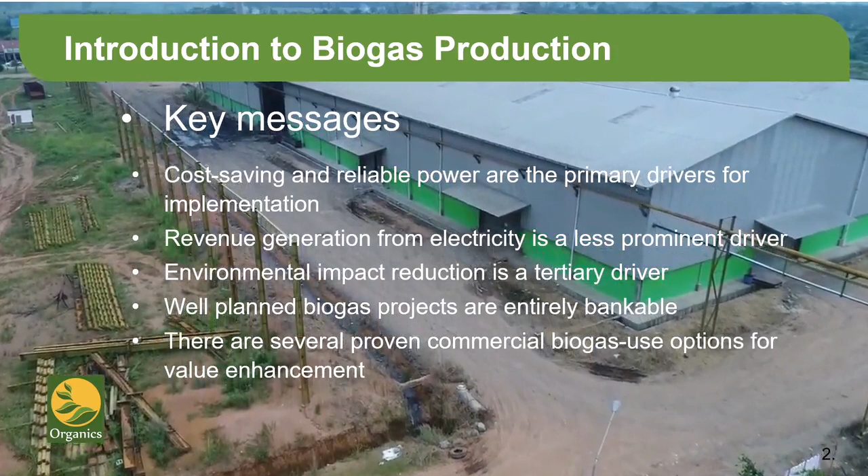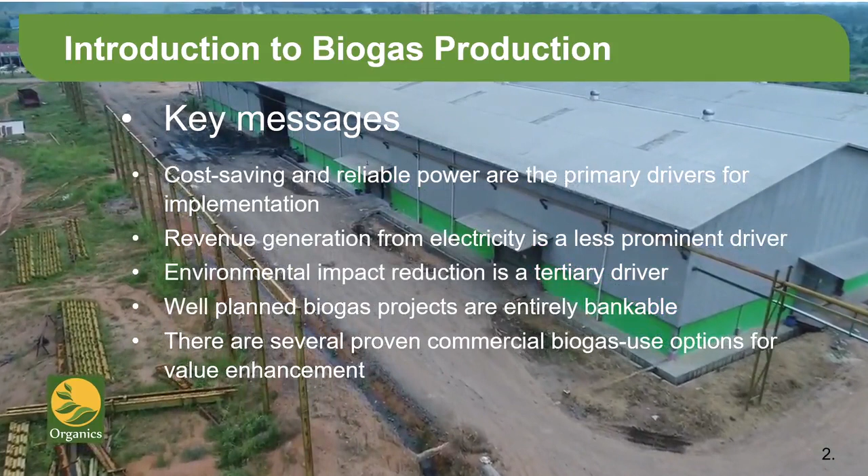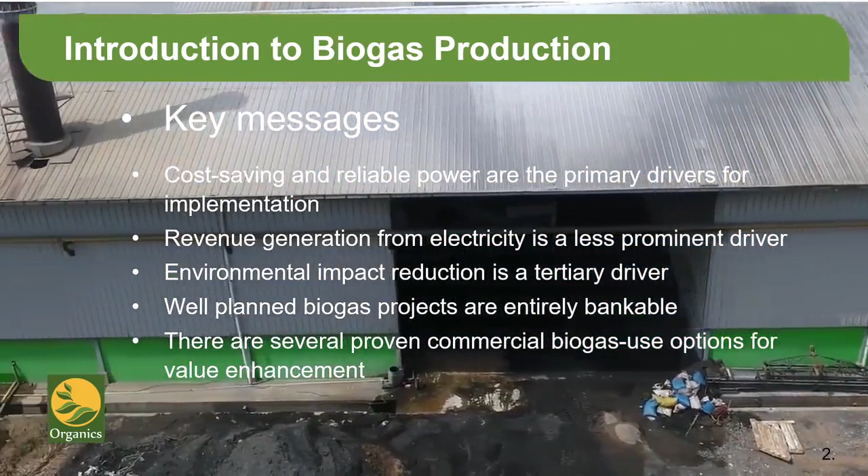Unsurprisingly, that is the primary objective. Another key objective is to ensure that power is available when it is needed. Factories function badly when they are subjected to random power outages.

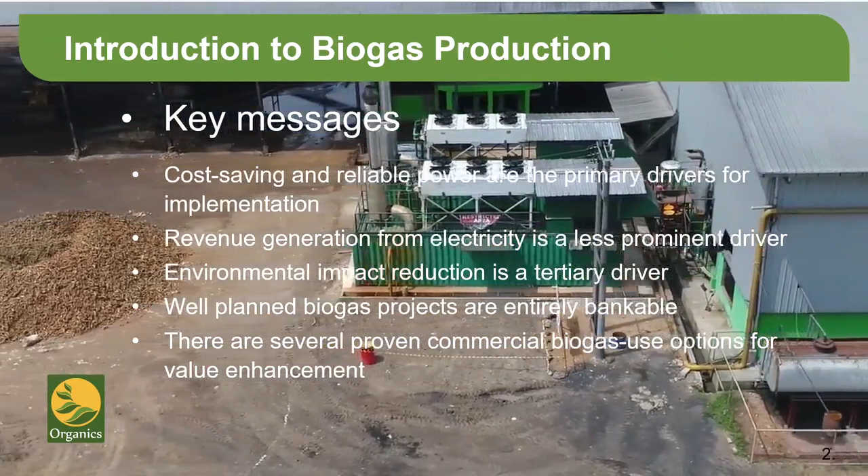Nevertheless, an objective of increasing global importance is that of environmental impact reduction. People are concerned about the environment and they do want to reduce environmental impact. There is a limit to how far you can go with this objective financially, but when it is combined with sound commercial reasoning, it is an obvious plus.

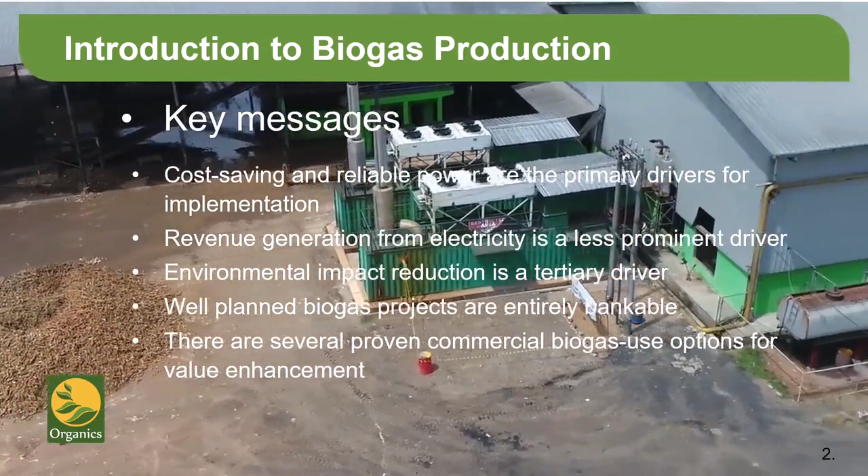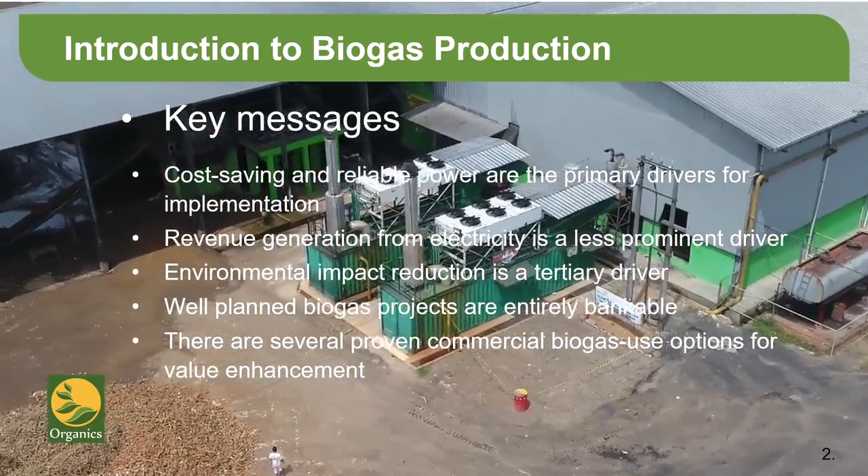Another key message we hope we will communicate today is that well-planned biogas projects are entirely bankable. As we know, banks are not in the risk business. A bank's risk from a well-planned and executed biogas project is as good as zero.

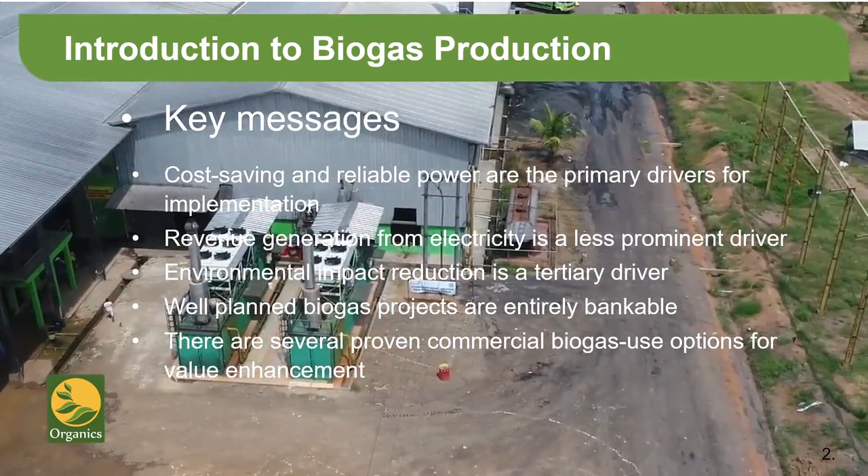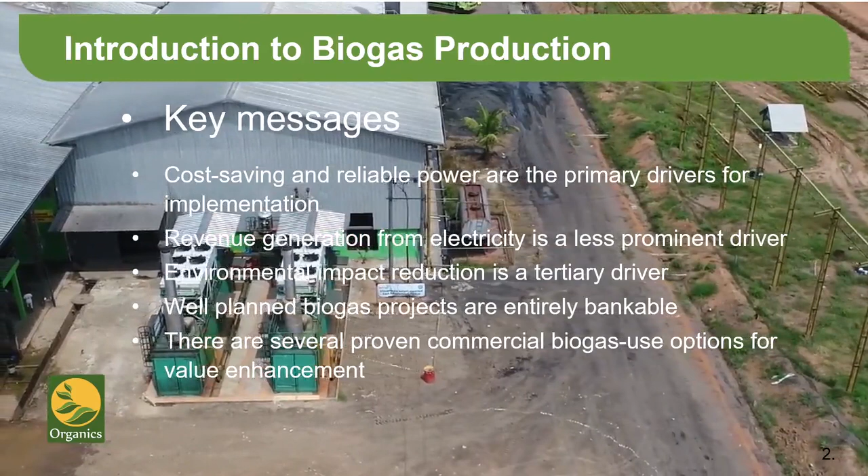Well-planned projects benefit from all of the acquired learning that has taken place over the last 20 years and apply it to the specifics of new situations. This leads to reliably operating biogas facilities, creating added value for their investors.

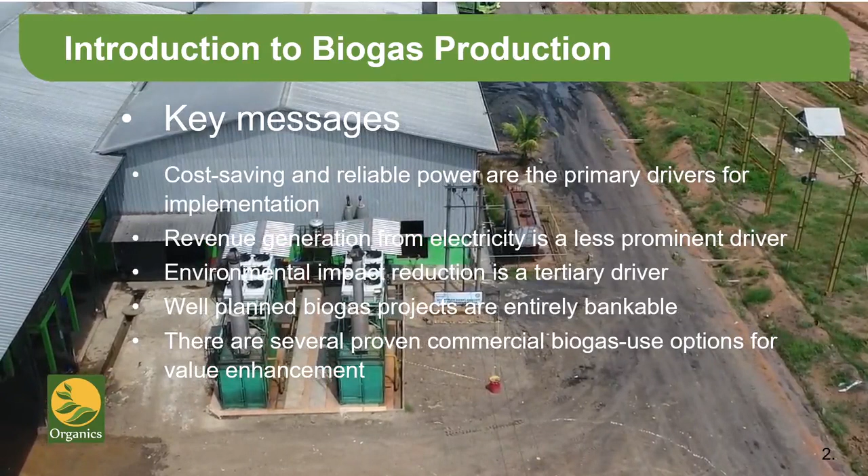The final message is that there are several ways in which biogas can be used to create added value. This added value can enhance the final net benefit for all of the parties involved.

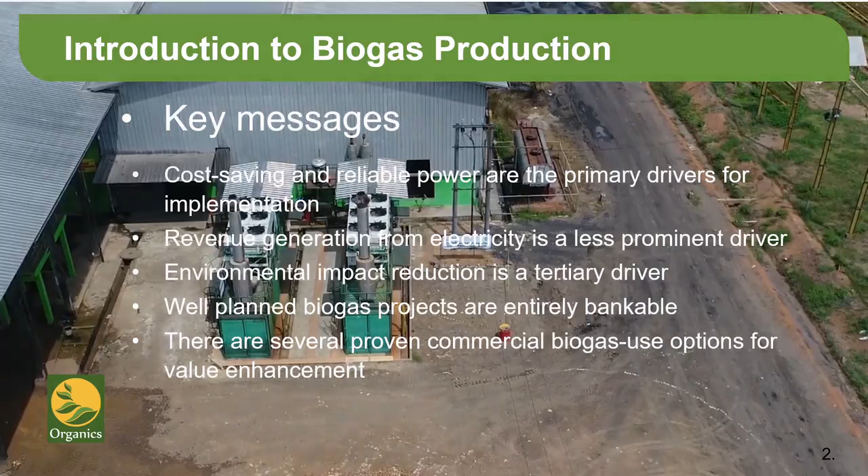In terms of economic opportunity, on-site power production is, again, the major source of economic benefit. For example, the use of biogas can significantly reduce the cost of site power for the operation of the facility hosting the biogas project.

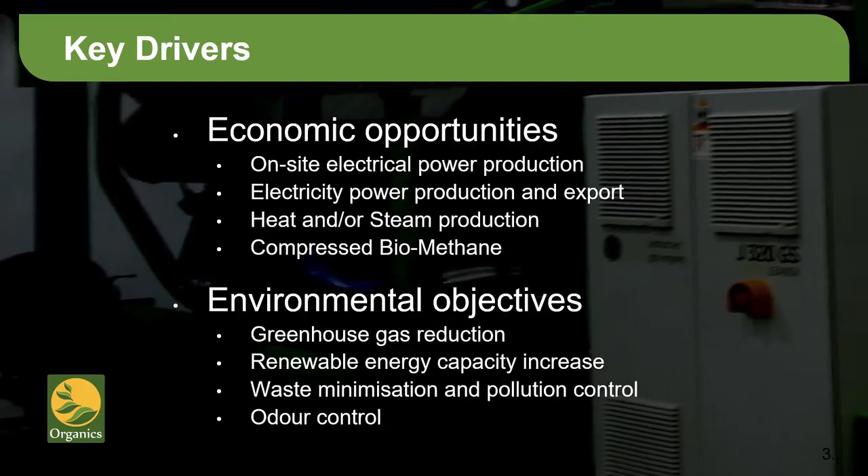The second commercial incentive encountered is the possibility to produce power and export it to the grid. This option has been somewhat less attractive over the last few years in countries such as Indonesia, but there is a hope that the situation will soon change. Where an adequate feed-in tariff is paid, such projects can be built to supply power to a local network.

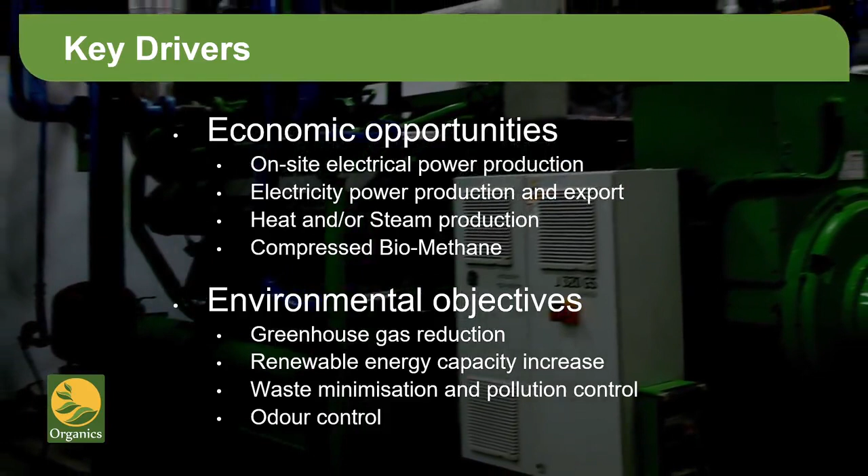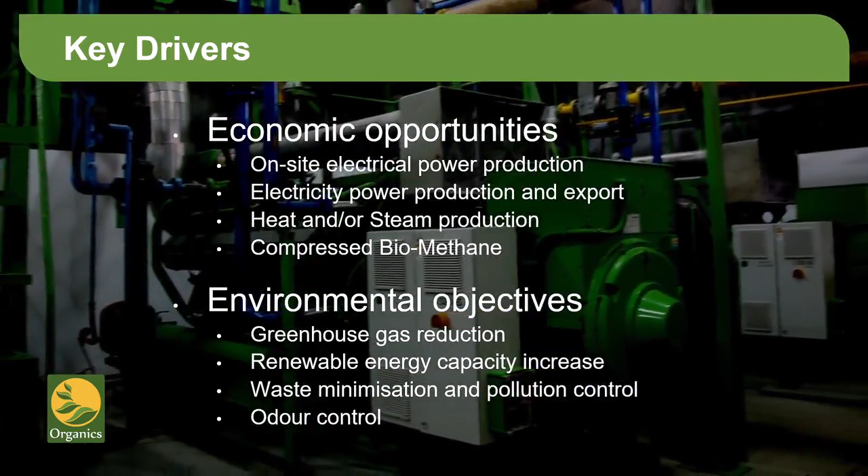Steam production is possible where biogas can be fed directly into a boiler. In actual fact, there is minimal modification required to convert a diesel or biomass-fired boiler to accept biogas, so the fuel may be used in existing boilers with minimal technical intervention.

Another potential use of biogas is as compressed biomethane. Here the methane component of the gas may be used as a vehicle fuel. This possibility is especially of interest where a vehicle fleet is involved, running within a prescribed area and returning to base regularly.

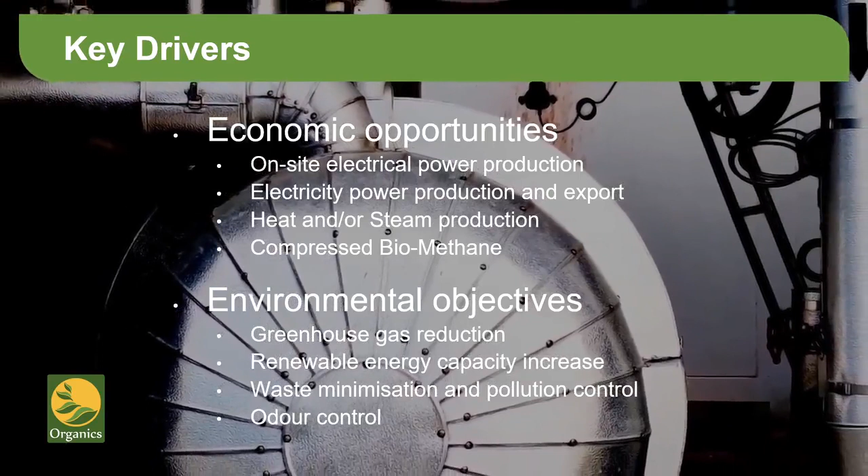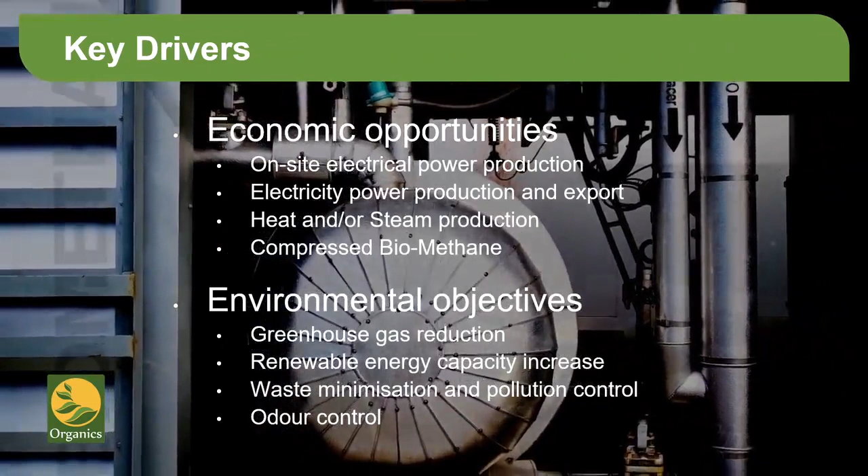In terms of environmental contributions, these are clear. Greenhouse gas reductions are achieved by not releasing methane into the atmosphere. Increasing renewable energy capacity will, in many locations, offset either coal or diesel, another environmental benefit.

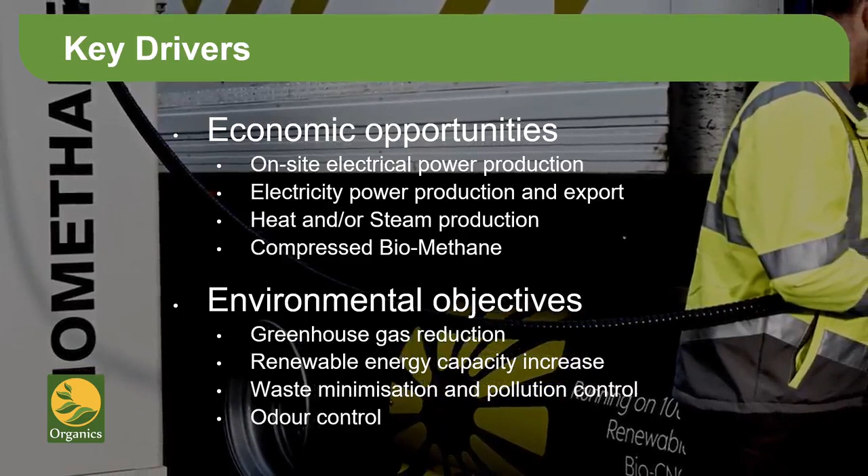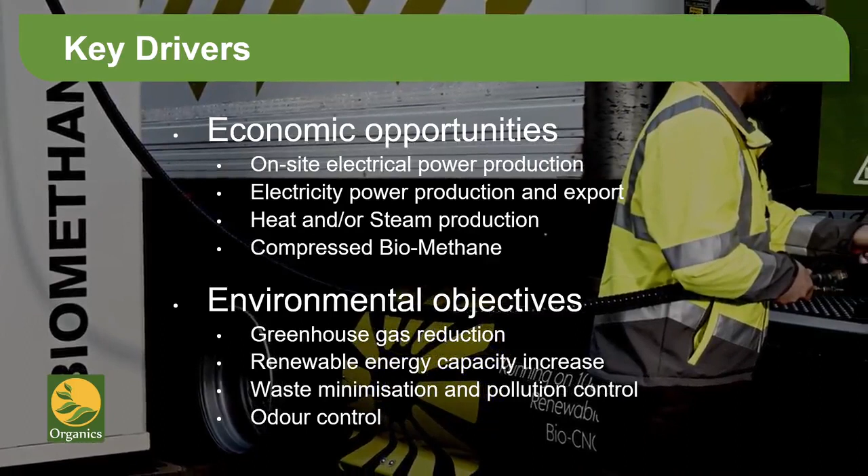Waste minimization and pollution control may be important, subject to the feedstock type and the facility location. Most mills already have pollution control facilities in place. However, feedlots may benefit from anaerobic digestion to convert a discharge problem into an asset. Anaerobic digestion will reduce the amount of lagooning required to achieve a discharge consent.

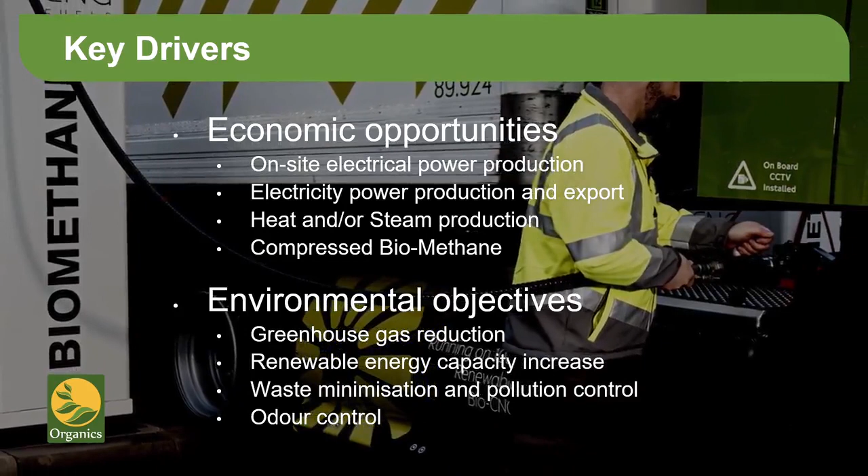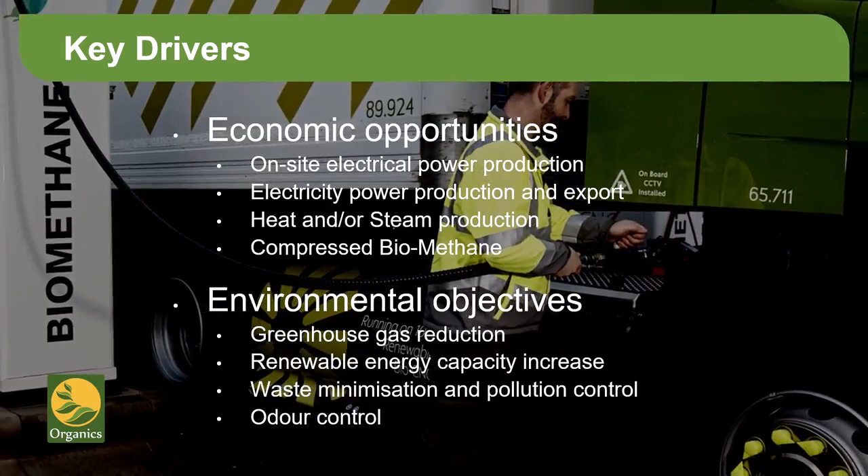Finally, an often important environmental benefit is that odors can be controlled by covering a lagoon and capturing the gases, and hence capture and reduce odors that would normally have been released to atmosphere.

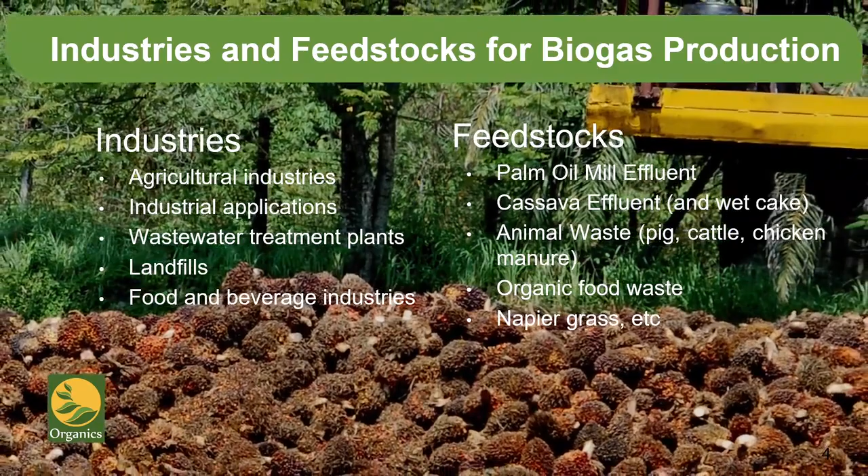Biogas production can be an asset for a great many different types of industries and businesses. Agricultural industries such as palm oil mills, cassava mills, pineapple processors, and other agricultural facilities where there are large organic waste streams may be suitable for biogas production.

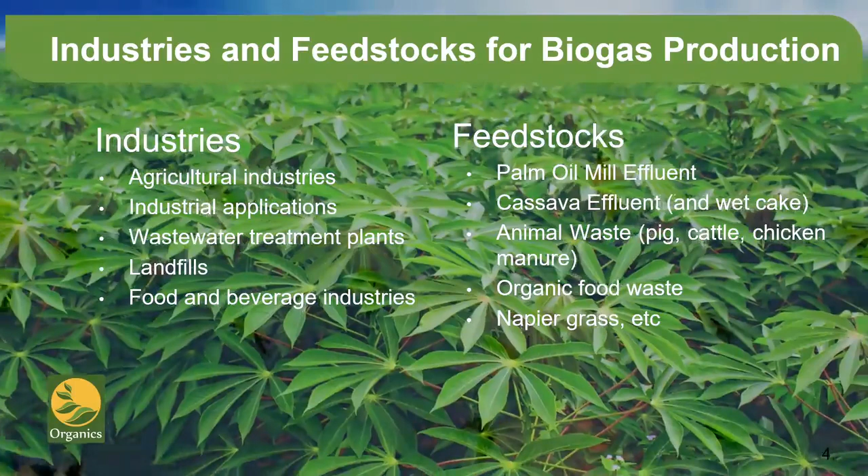Industrial applications include, for example, pulp and paper production, where waste from the pulp process may be used to produce biogas. Wastewater treatment plants are well known as a source of biogas. Landfills also produce a great deal of biogas. Finally, the food and beverage industry can produce biogas using the wastewater emitting from the production facility.

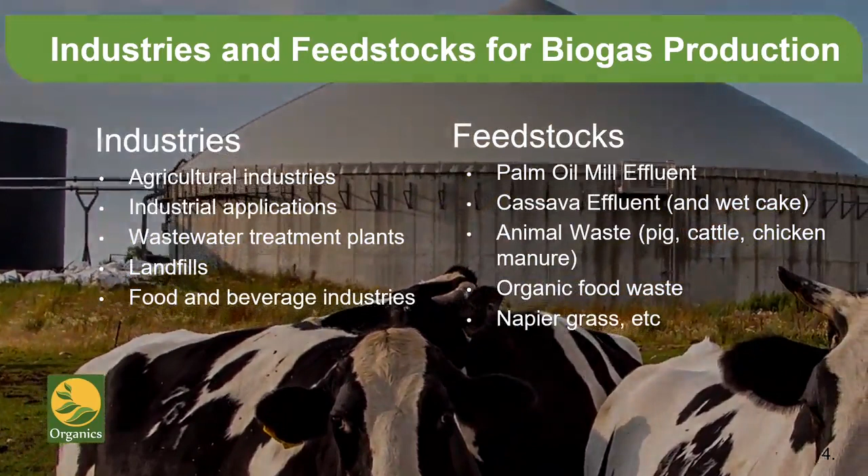The sorts of feedstock that we are all familiar with include palm oil mill effluent (POME), cassava mill effluent, animal waste from pig, cattle and chicken farms, organic food waste, Napier grass, and a great many other organic waste streams. In many situations, an environmental problem can be converted into a valuable revenue-generating asset.

To give an idea of the order of magnitude of the contribution that can be made by biogas, we can use the example of palm oil plantations in Indonesia.

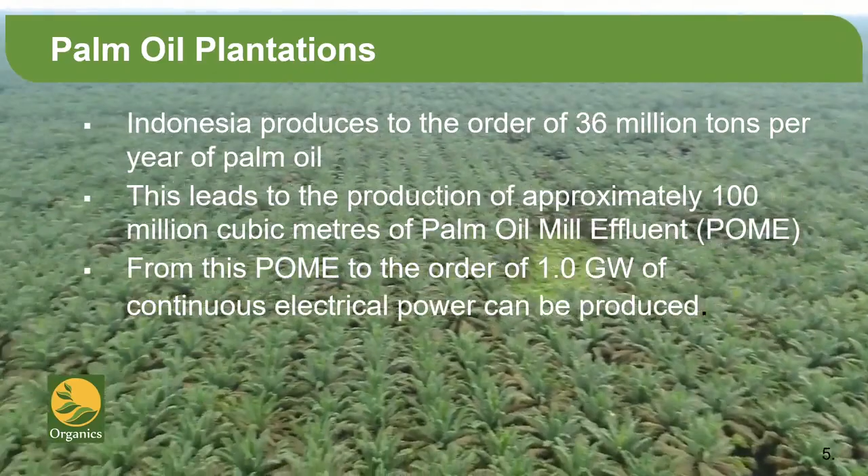Indonesia produces to the order of 36 million tons per year of palm oil. This would lead to the creation of approximately 100 million cubic meters of palm oil mill effluent per year. Taken as a whole, from such a flow of POME, to the order of 1 gigawatt of continuous electrical power can be produced. This is by no means insignificant and would be a meaningful contribution to Indonesia's power requirements going forwards.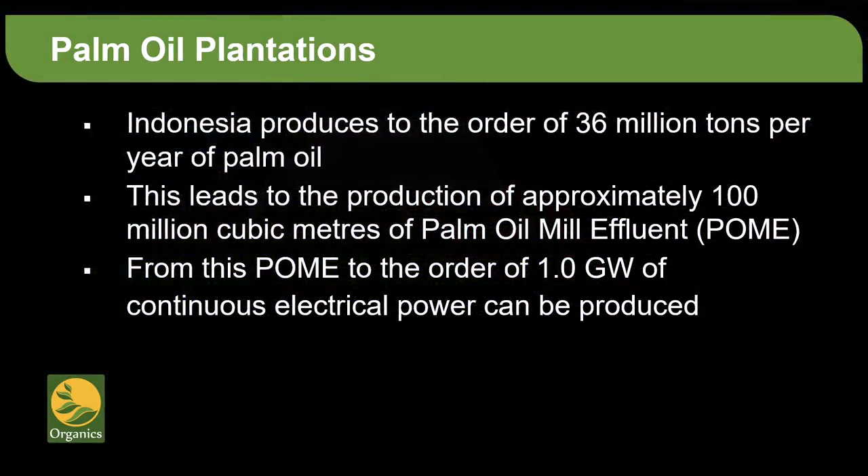The following typical example is given to demonstrate the quantity of biogas that can be produced from a typical palm oil mill. There are many rules of thumb employed in the assessment of biogas production. From POME, we have used 0.6 cubic meters of water per ton of fresh fruit bunch.

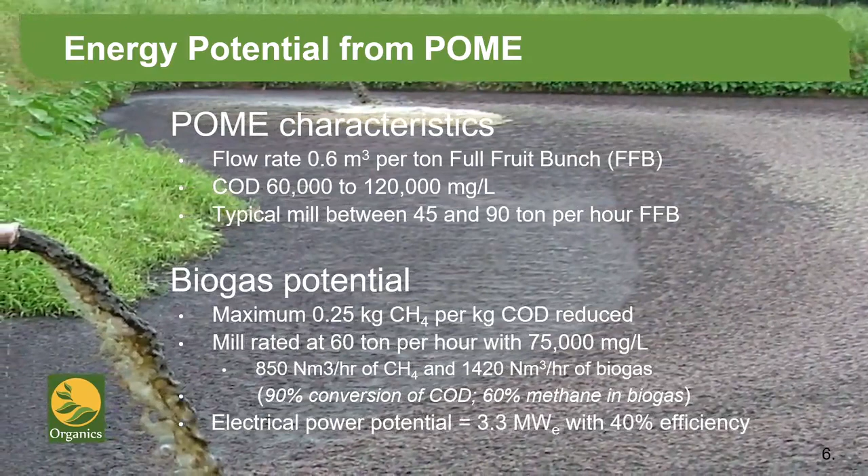COD, chemical oxygen demand, is a commonly employed measure of how much carbon is in the wastewater. For POME, this measure can be variable from mill to mill. A range of 60,000 to 120,000 milligrams per litre of COD is typical.

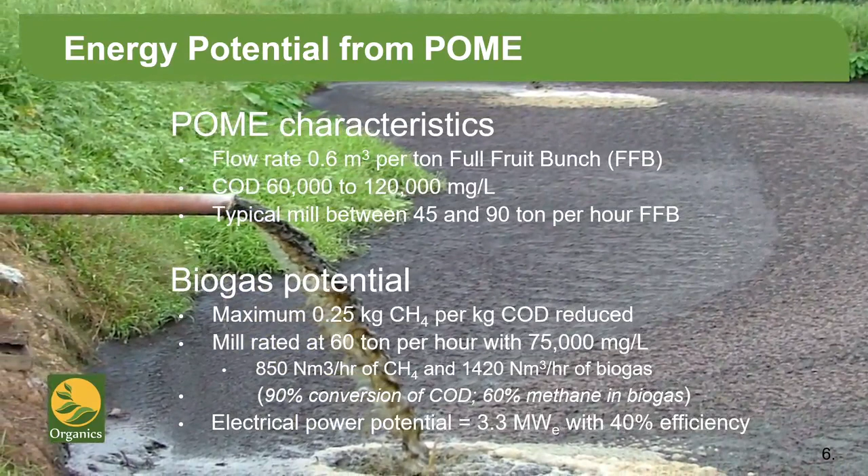Mills themselves range between 45 and 90 tons per hour of fresh fruit bunch, although there do exist smaller and larger ones. For the purposes of estimation, a figure of 0.25 kilograms of methane is taken as being produced per kilogram of COD that is removed from the wastewater.

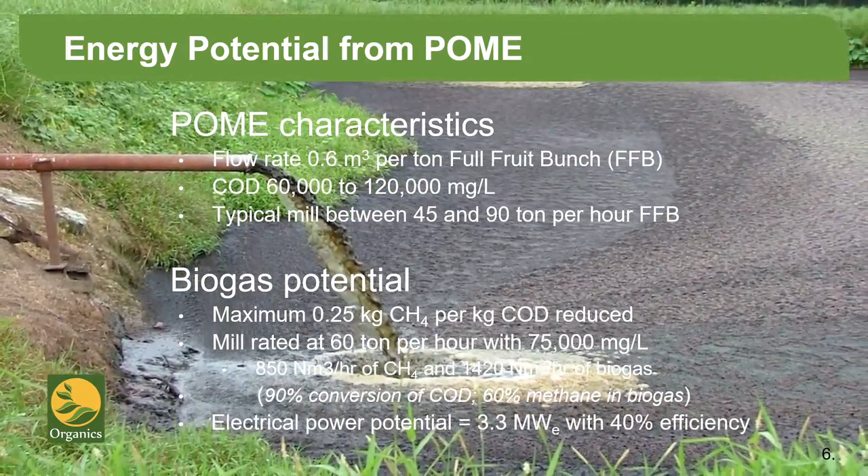A mill rated at 60 tons per hour with, say, 75,000 milligrams per litre COD would be able to produce 845 cubic meters per hour of methane. That is enough to generate 3.3 megawatts of electricity on a continuous basis.

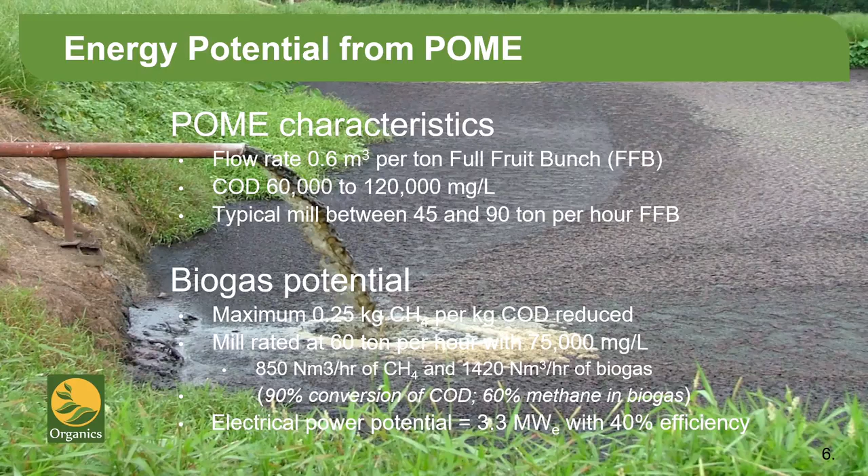Slide 7. Taking the previous example further, for the same mill, this amount of methane production, if used in a biogas engine, would avoid the release of 90,000 tonnes per annum of carbon dioxide equivalent. This is different from certified emission reductions, but it is a measure of the amount of methane that is being consumed in the gas engines.

In terms of diesel offset, 3.3 megawatts would require approximately 20 tonnes per day of diesel. This would add around 18,000 tonnes per year of CO2 into the atmosphere. If the electricity were fed into the grid with a grid factor of 0.5 tonnes of CO2 per megawatt hour, this gives a saving of around 12,000 tonnes of CO2 per year.

CERs, certified emission reductions, are a measure of the net greenhouse gases saved from being released into the atmosphere. For a project of this nature, CERs would typically be in the order of 50,000 per year. However, CERs have fallen into disrepute because of the price collapse that occurred about 10 years ago.

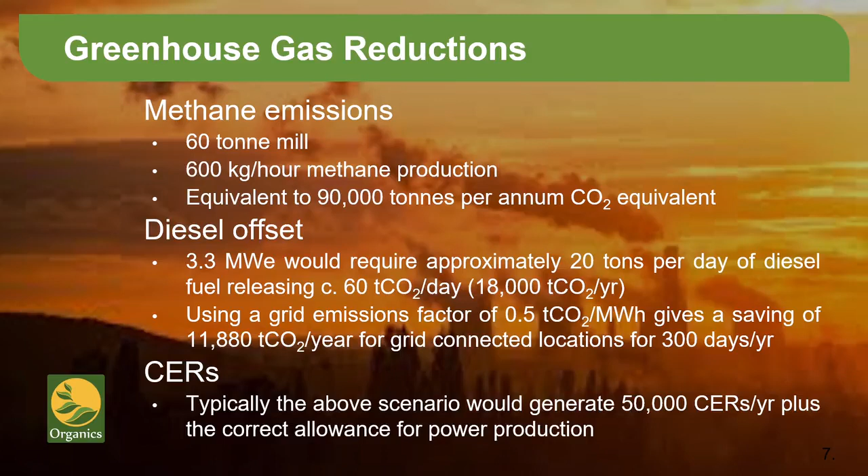The key objectives in the construction of an anaerobic digestion system are to maximize the biogas production through design optimization, maximizing mixing and using retention time, and having control over the pH, ideally with minimum operator intervention.

One would like to see the project delivered rapidly and on time, which means concentrated project planning and developing professional troubleshooting capacity. It can reasonably be expected that there will be difficulties. The overriding requirement remains to maintain product quality. This means that focus on materials, component selection, construction management and supervision are all critical to ensure a successful project.

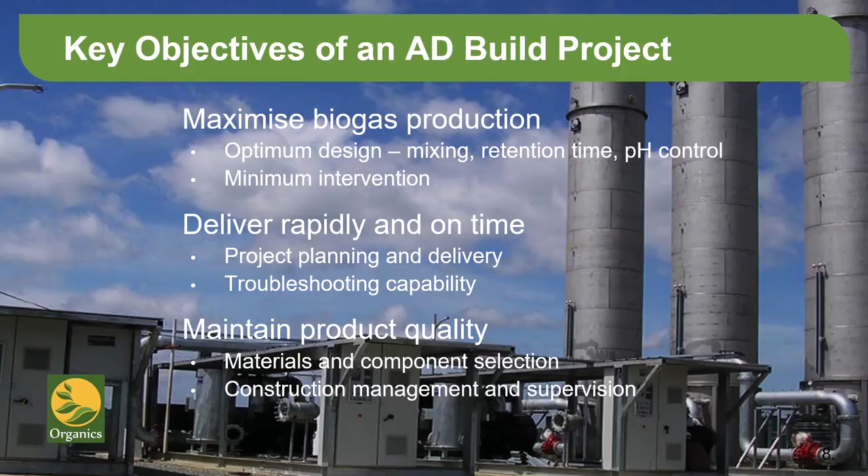Biogas can contain hydrogen sulphide, which is a highly corrosive gas, carbon dioxide, which is not particularly corrosive but dilutes the methane, particulates and moisture. In some cases, oxygen and other trace gases may be present. The feed train is designed to process the biogas into conditions suitable for use in the specific equipment to be employed.

A blower skid introduces the pressure that extracts the gas from the anaerobic digester, draws it through a bioscrubber, and delivers it to the point of use.

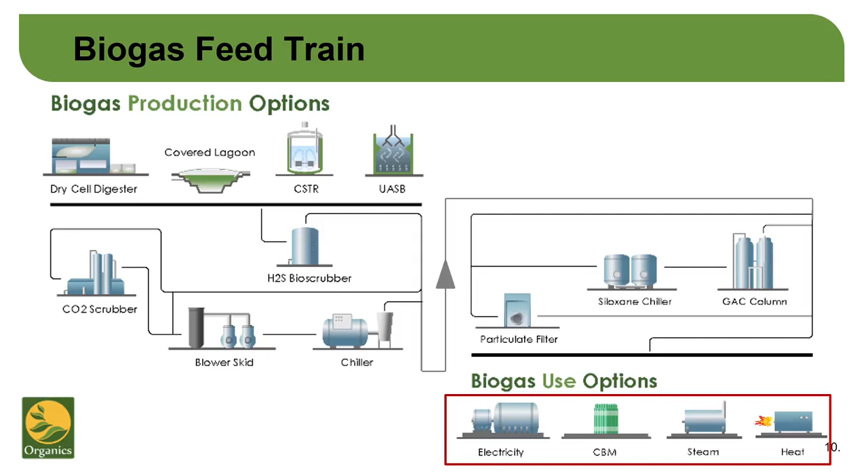Looking more specifically at the main process equipment involved in a typical factory farm-scale biogas production system with a covered lagoon, we have the following.

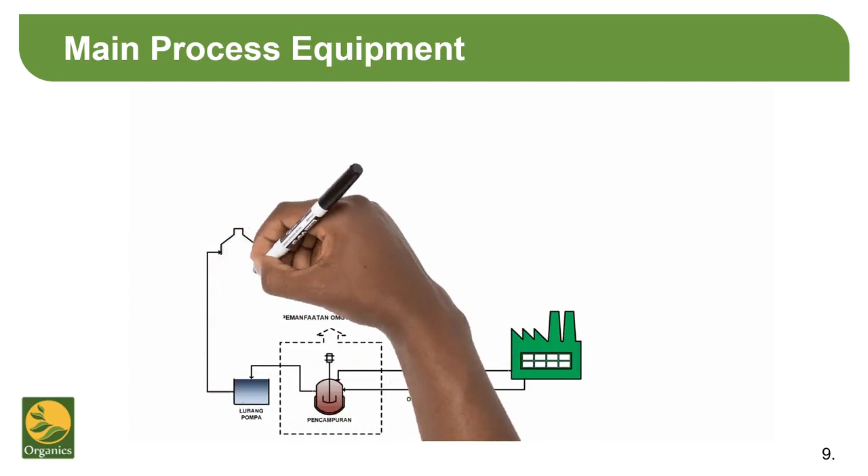Wastewater is passed from the mill to the pump pit. The pump pit buffers and stabilizes the flow into the anaerobic digester. An important option with cassava is to use wet cake or filter press cake within the anaerobic digester. In the case of tapioca, this can enhance gas production quite significantly.

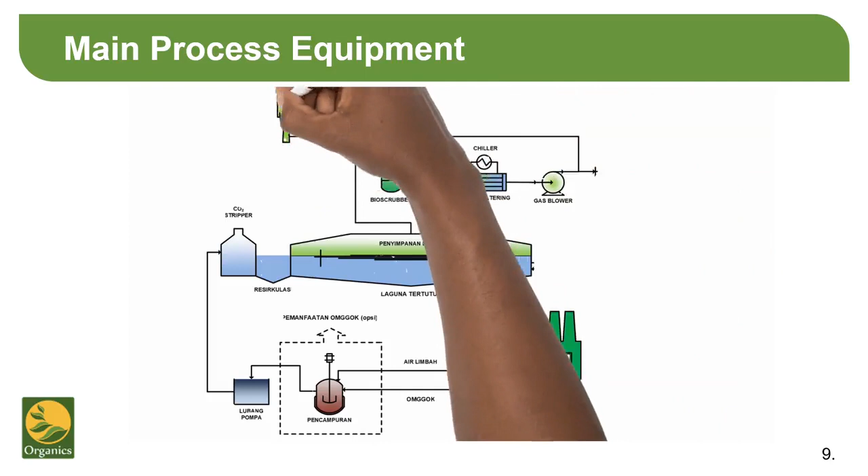Taking a typical organics bioreactor configuration, we have a carbon dioxide stripper and a recirculation point at the feed inlet, which we refer to as the combined structure. This unit helps control pH and mixing of the whole system.

Next, we have a covered lagoon, and as part of it, an optional biomass filtration system designed to help retain biomass within the reactor. It may be desirable or even necessary to have a suitable aeration system, such as a sequencing batch reactor, to obtain a compliant discharge with low BOD/COD concentrations.

On the biogas side, the gas passes through a bioscrubber, a gas dewatering system, a gas blower, a particulate filter, and in this case onto a gas engine. A standby flare is required for times when the gas engine is not operating.

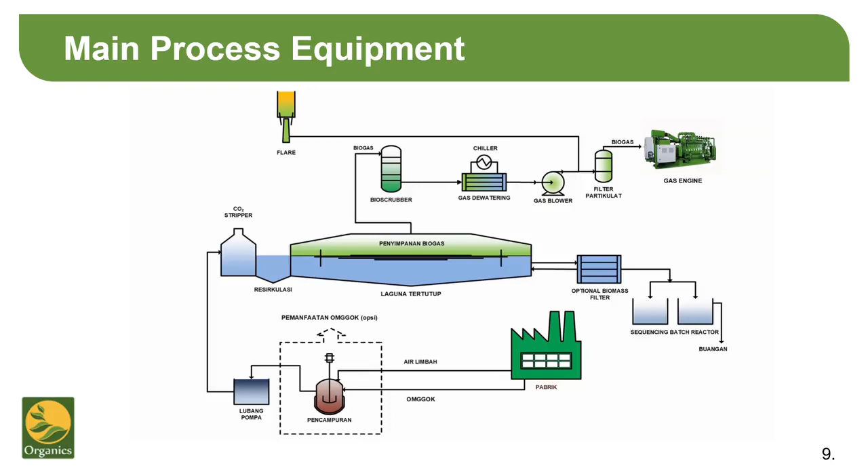With regards to the anaerobic digester, there are 4 possible options available that we will consider here. There are, in actual fact, many different types of anaerobic digester, but these are the 4 principal ones being generally applied. The dry cell anaerobic digester is, as the name suggests, not suitable for low solids liquid waste streams.

It is ideally suited for low moisture content organic waste streams, such as the biomass fraction derived from municipal solid waste, or dry crop waste such as vegetable waste or corn cobs.

The covered lagoon, that is the original covered lagoon with internal baffles, has been largely superseded in the market by the covered lagoon bioreactor. In the covered lagoon bioreactor, systems have evolved and developed to give better sludge management, improved gas production, and an overall generally better performance.

The continuously stirred tank reactor, or CSTR, is usually built as a circular steel tank. These are encountered where available space for the reactor is limited. The CSTR has a shorter retention time and therefore may result in lower gas production.

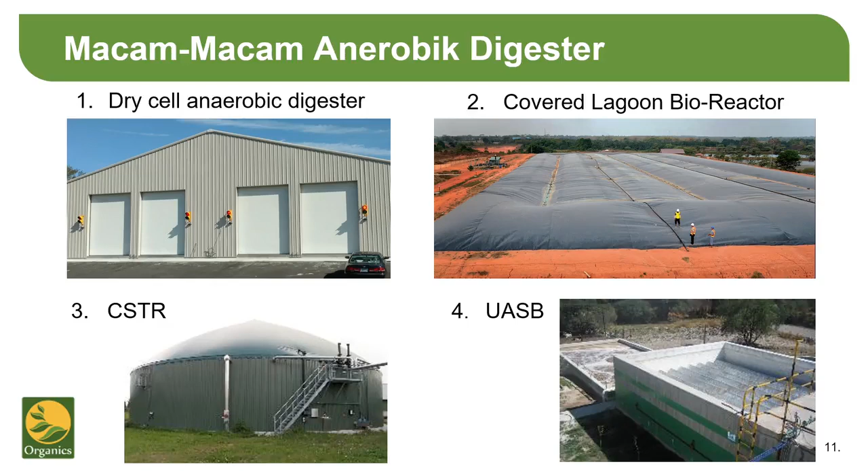Here we have an example of a palm oil mill anaerobic digester. This particular reactor has a capacity of 60,000 cubic meters and is working with the effluent from an 80 ton per hour mill in Kalimantan.

The POME has a flow rate of 1,152 cubic meters per day, and it is producing 70,000 cubic meters of biogas per day. In this particular case, there's no bioscrubber and no biogas dewatering plant. Biogas is fed directly into a boiler. If it were connected to a power generator, it would produce the equivalent of 7.5 megawatts of electricity. This relatively high figure comes as a result of a very high COD content within the POME at this particular site.

Here we have an anaerobic digester working with a cassava mill. In this general case, the rule of thumb is that the carbon within the liquid waste stream from the cassava mill is usually adequate to produce enough electrical power to run the mill.

This mill was experiencing regular interruptions to its power supply. With the use of a biogas system, it was able to become self-sufficient in electrical power. In this facility, we have a 50,000 cubic metre lagoon that is processing the wastewater from a 200 tonne per day cassava mill.

The lagoon can produce 19.2 thousand cubic metres per day of biogas, enough for 1.9 megawatts of electricity. In this case, the wet cake is not being added to the lagoon because that would produce excess power, and the mill has no method of using it. The objective was to stabilize power to the mill and no more. Should more power be required, the wet cake represents an opportunity to be developed.

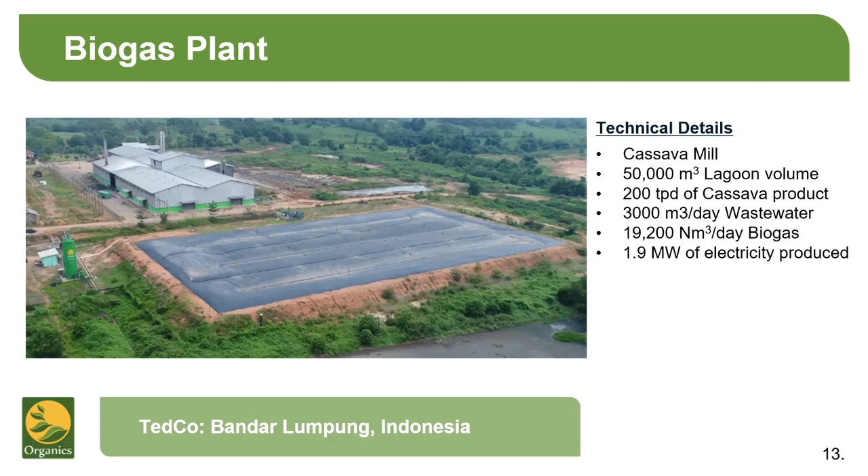This is a site in Sulawesi designed to operate with cassava waste. We can see here a 75,000 cubic metre lagoon under construction. As you can see, this is a fully lined system to prevent any possibility of local water contamination and general leakage. The internal architecture, as shown, is in the process of being installed. The system will have pipes running along the base of the lagoon to enhance mixing and sludge control and general biogas production efficiency.

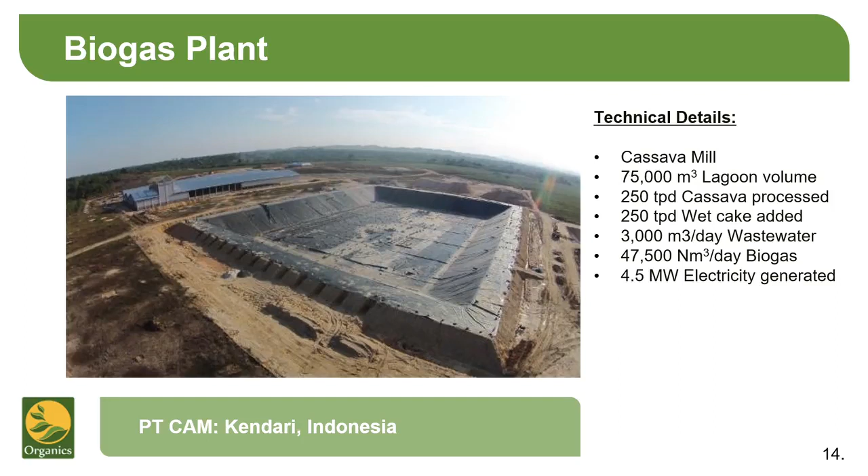This system will take 3,000 cubic meters per day of wastewater and will produce approximately 47,500 cubic meters per day of biogas, enabling it to generate 4.5 megawatts of electricity. Again, this power is solely to run the mill and to ensure reliable power is supplied to the mill's daily operations.

I will not go into a comparative analysis of all of the many different types of bioreactor in this presentation. Here we are focusing mainly on the covered lagoon bioreactor. The pluses are that the cost is relatively less than the alternative option. It is not difficult to construct, although factors such as the rainy season and access do present challenges. Geosynthetic covers are readily available. It is a very stable process with a high internal reaction inertia, and the long retention time leads to a high conversion of COD to methane.

The negatives of such a facility are that cheap covers can reduce the lifespan of the cover. This is, in fact, a simple relationship between quality and cost. Good quality usually costs more, and as we know, only quality is truly sustainable.

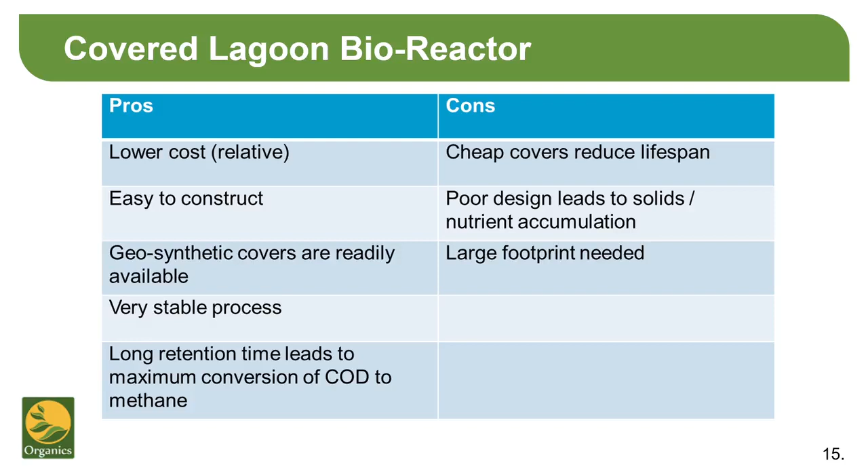Poor design can lead to solids and nutrient accumulation. We have seen in certain situations where the bioreactor has filled up with solids. In such a case, it would be necessary to lift off the cover and re-engineer the internals to excavate out the accumulation. One thing that is unavoidable is that a large footprint is required. So if you are short of space, a covered lagoon bioreactor is probably not the right solution.

Here we have examples of hydrogen sulphide bioscrubbers. They can actually be vertical or horizontal, but people tend to prefer the vertical tank as it requires less installation space. The hydrogen sulphide bioscrubber prevents corrosion in downstream equipment. Hydrogen sulphide is an acid gas and will quickly damage boilers and gas engines unless it is removed or unless great care is taken in its use.

The bioscrubber also reduces hazards to health. Hydrogen sulphide is a highly toxic gas. Comparatively small amounts can kill you outright. 800 ppm is the lethal concentration for 50% of humans for 5 minutes exposure, LC50. Concentrations over 1000 ppm cause immediate collapse with loss of breathing, even after inhalation of a single breath.

Removing hydrogen sulphide from biogas reduces emissions of sulfur dioxide from all combustion equipment. The bioscrubber also reduces noxious odors. A typical bioscrubber can remove 98% of the hydrogen sulphide contained in biogas.

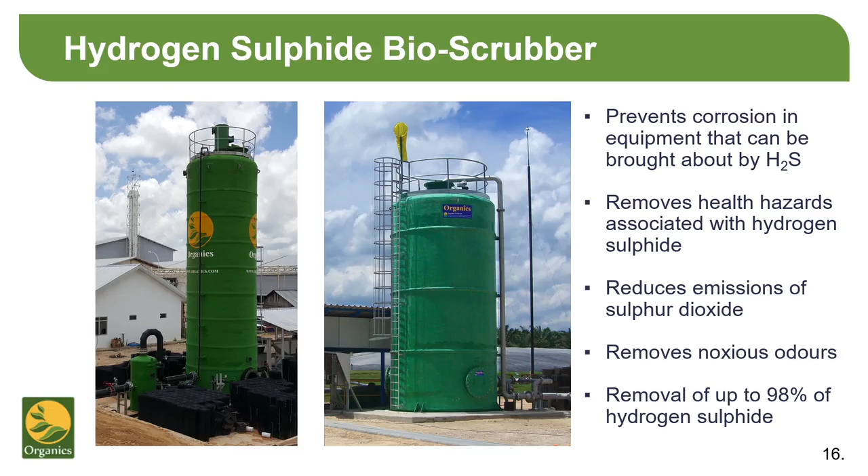A biogas dewatering unit is an important component when using biogas in a gas engine. It reduces the moisture content of the gas down to manageable levels. Typically, you will want a relative humidity at a maximum of 80% at 40 degrees C. This limit can vary from engine to engine and application to application. The biogas dewatering unit removes the moisture and then reheats the biogas to drop the relative humidity. It will also filter the biogas so that particulates are removed prior to the burner or gas engine.

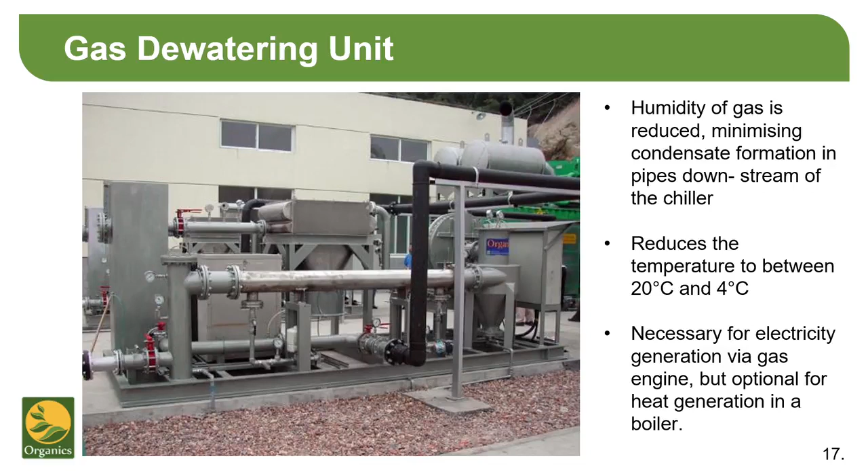Gas blowers come in many different shapes and sizes. Here we have a series of 3,000 cubic meters per hour gas blowers, each rated at 450 millibar pressure. 450 millibar is high for a typical biogas utilization system, where 300 millibar would normally be adequate. In this case, the higher pressure was required because of a long pipeline to the point of use. Biogas flow rates can vary from 50 to 20,000 cubic meters per hour or more.

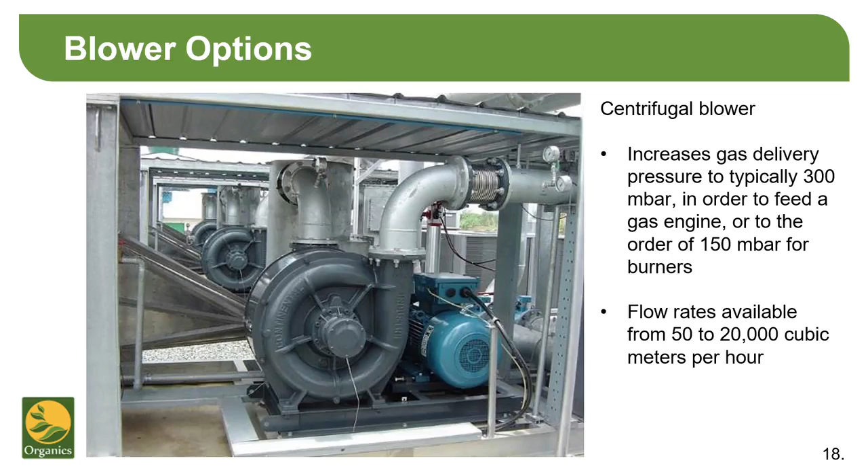Once again, there are many different options available for gas flares. The unit on the left-hand side with the two gentlemen in blue is what we call an open flare. This arrangement is perfectly acceptable for use as a standby flare for an anaerobic digester. The flame burns out in the open and there is no reliable means of measuring destruction efficiency.

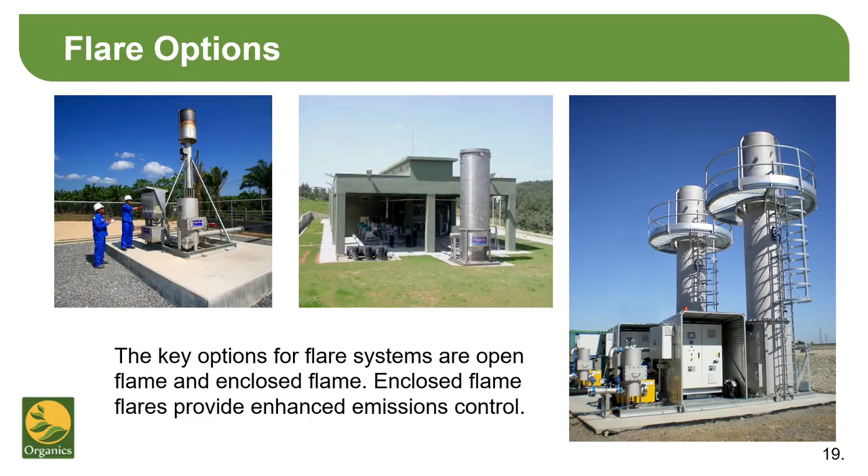The unit in the middle is fitted to a plant in Turkey, where the requirement was to hide the flame and to maximize methane destruction efficiency for a CDM project. The units on the right-hand side are located in Australia, near Melbourne. They were installed close to a housing estate where there was an absolute requirement to avoid the visibility of flames and to minimize emissions releases.

This project at the Puchong landfill site near Kuala Lumpur has an open flame elevated flare with a visible flame. This unit was used as a standby flare, in this case supporting a landfill gas power station rated at 2 megawatts. We can see two 1 megawatt Jenbacher gas engines behind the flare and the fuel skid doing the chilling, the gas filtration and the pressure boosting of the gas for use in the engines.

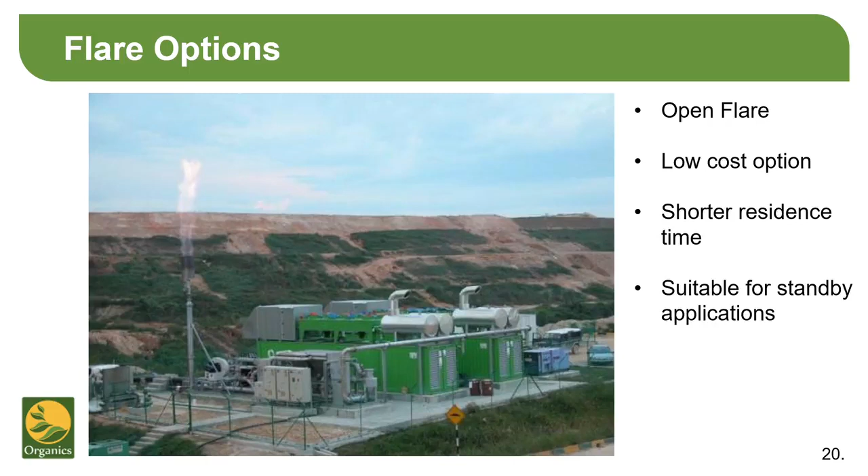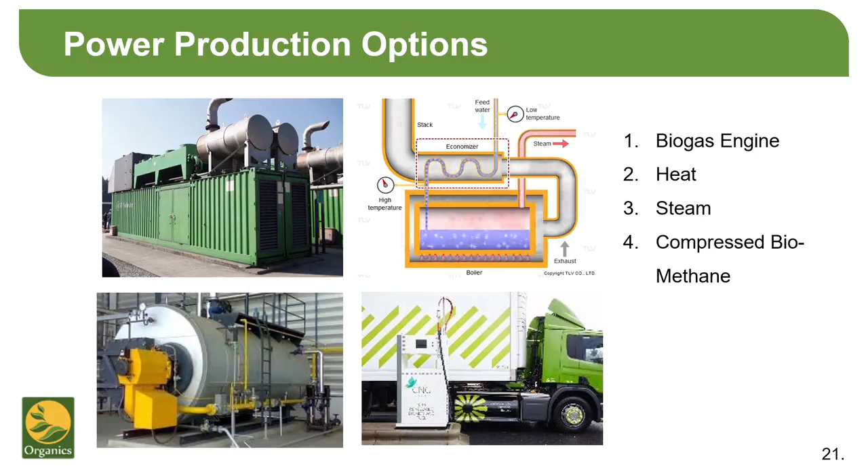Working in remote locations presents many challenges to contractors. In the case of biogas construction associated with the mill, this often means that the mill is in a remote location where access conditions are challenging.

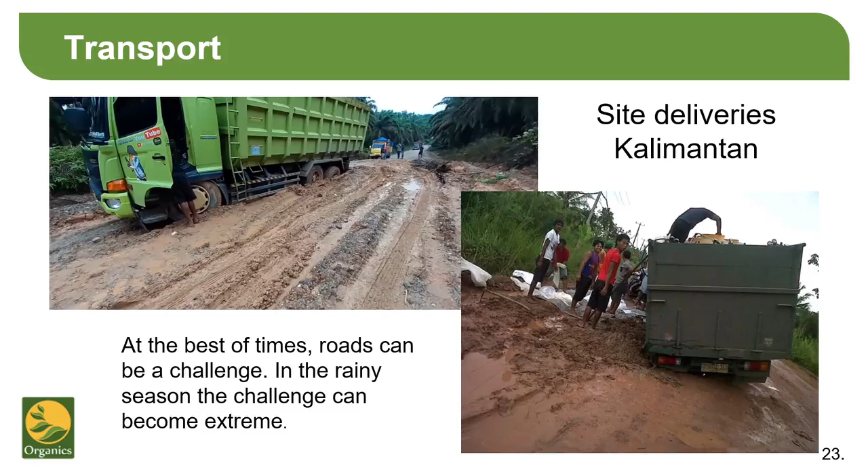Accidents and errors occur. You always need to be careful about when the rainy season falls to make sure you're not trying to work with soil when it is raining heavily and regularly. Social issues also need to be borne in mind, as local people do not appreciate being taken for granted. Great care is needed to ensure that neighbours understand what's going on and to win their support.

And finally, the great challenge in all such projects is that of the unforeseen event. Even with the best planning, there will always be hiccups. It is necessary to be ready to work with local people who can overcome them.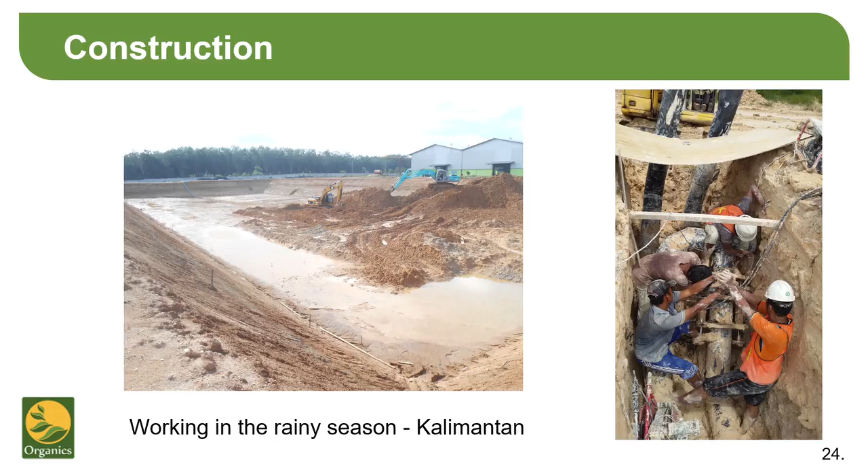The COD removal efficiency, as you can see, is 90% or above. The organic loading rate, that's the rate at which the organic material in the lagoon is removed, is quite high for a covered lagoon. A UASB may be considerably higher than this, but then a UASB requires a lot of attention and also the removal of insoluble solids.

The particular arrangement of the covered lagoon provides substantial process inertia, meaning that it can take big knocks in terms of feedstock contamination and still perform well. It can also be operated by a competent technician and does not require a chemist to assess what is going on.

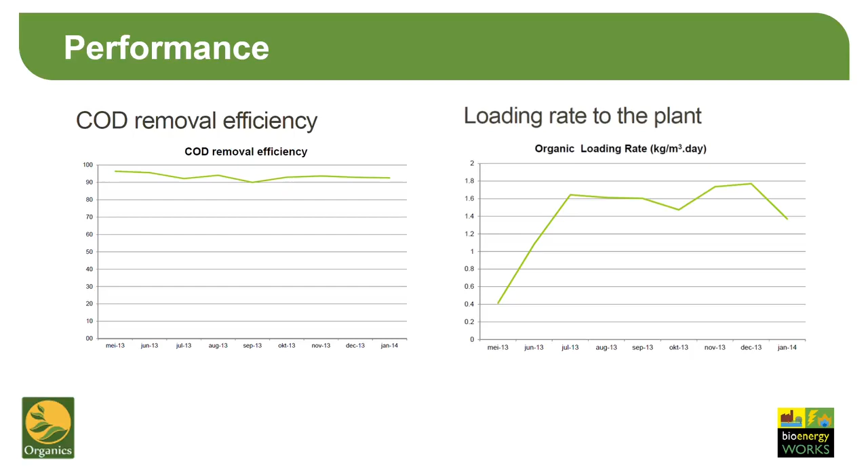Recent technical advances have led to higher organic loading rates and better general performance. As with everything, it is a matter of seeking continuous improvement.

The waveform recirculation system leads to higher conversion rates and higher bacterial retention. The control of pH with non-chemical acid control is an important development and avoids the need to store sodium hydroxide or lime on site. In normal operation, it is not necessary to add chemicals. Enhanced mixing through recirculation dynamics and pH control are both functions delivered by a combined structure, which ensures such a system can be controlled in one location.

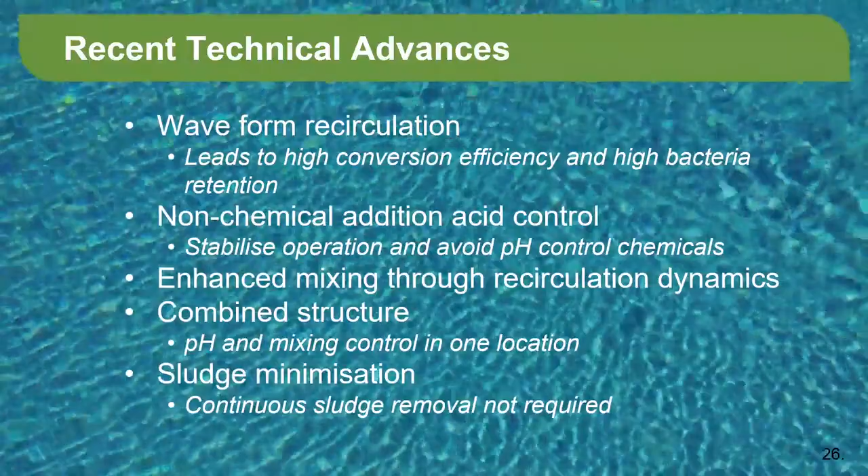A very important attribute engendered from the use of all of the above is that sludge production is minimized. In the case of the system monitored by Tycho Cohen, presented in the previous slide, no sludge removal was required for a period of 3 years and possibly longer. After 3 years, the detailed monitoring exercise was ended.

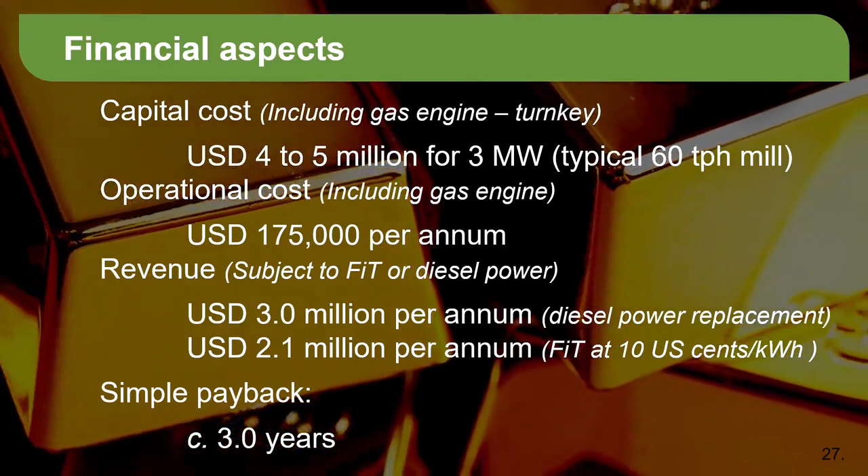Looking briefly at the subject of finance, the capital cost of such a system will be in the range of 4 to 5 million US dollars for a 3 megawatt plant, including the gas engines. The range of costs is a function of factors such as access, feedstock quality and quantity, and that sort of thing. Operating costs can be quite variable, but 175,000 to 200,000 per annum is typical, including the operating cost of the gas engine, which is the most expensive item.

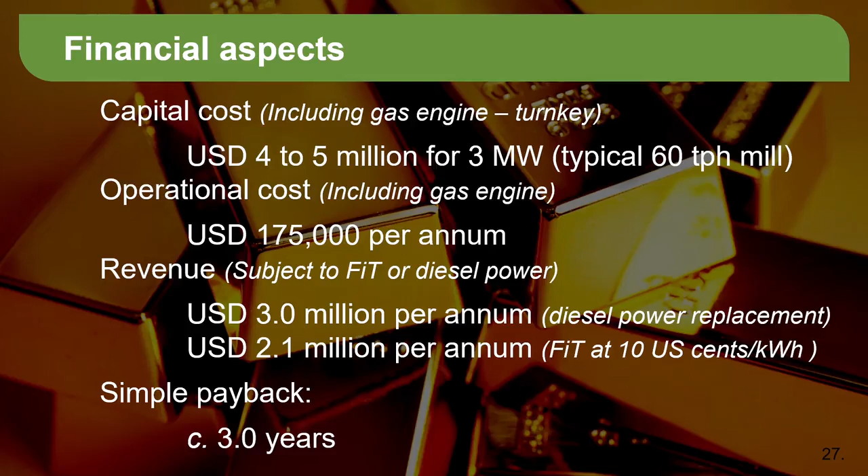Revenue is subject to whether electricity is exported or used to replace diesel power. It may be to the order of 2 to 3 million US dollars per year, giving a simple payback of circa 3 years. Revenue as a ratio of the capital cost and the operating cost can make this an attractive investment.

Bankability is a measure of how reliable and risk-free a project may be considered. The term bankability derives from the fact that banks who lend money are not in the risk business and therefore do not accept any risk. A bankable project is a project which contains no risk at all.

In the case of biogas projects, the technology is no longer considered a risk, as there are several hundred such systems in operation in, for example, Southeast Asia. The feedstock quality and composition are no longer considered to be risks, as many feedstocks are well characterized and understood. For effluent, there must be a long-term and inexpensive outlet, but again, for most agricultural situations, the effluent is not an issue. It may be returned to land as a fertilizer or treated in an extended lagooning system.

The ultimate test of bankability is the quality of the use to which the product is put. There must be somebody to use the energy. If it's self-use, then clearly energy will be assisting the financial viability of the project, providing the organic carbon used to produce biogas. If the energy goes to grid, such contracts are normally considered to be bankable, as operators can expect payment according to the terms of the contract without interruption or delay.

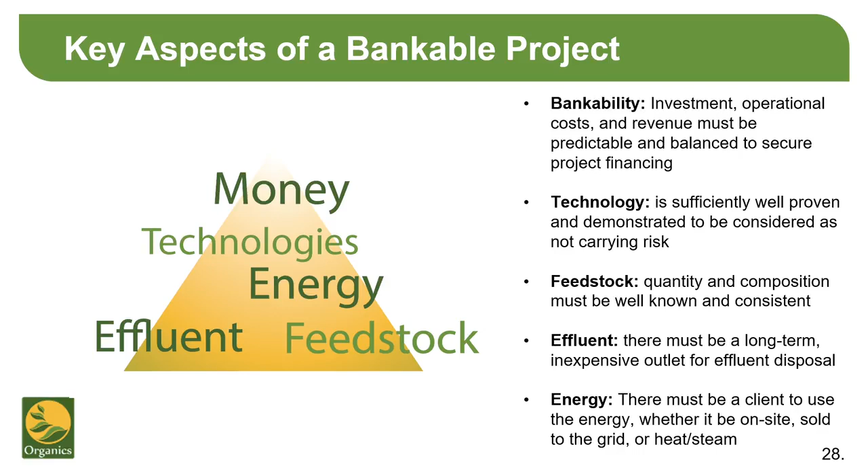There are various methods for financing such a project. The generally preferred method is that the owner of the mill pays for the plant and has it delivered on a turnkey engineering basis. Where there is an interest in third-party finance, several structures are commonly encountered, such as build, own and operate, or build, own, operate and transfer, or even design, build and operate, where the equipment is actually owned by an outside investor but is designed, built and operated by a contractor on the basis of specific terms and conditions. Simple leasing is another commonly encountered option. Then we have many different hybrid commercial relationships which can be developed, such as joint venture, partnership, equity loan, etc.

What will the future bring is a question that has been asked through the ages. With regard to global biogas, the big question mark that we all have to address is what impact COVID-19 will have on the world and on global trade. There is every reason to be optimistic that, after the passing of COVID, markets will rebound energetically. Although the oil price is currently exceptionally low, this cannot be expected to last. Oil producers will be looking to recover their losses. The simple way they can do that is by pushing the price of oil back to a higher level. Having seen the impact of their disagreement over price fixing, it is to be expected that oil producers will now seek agreement at every opportunity.